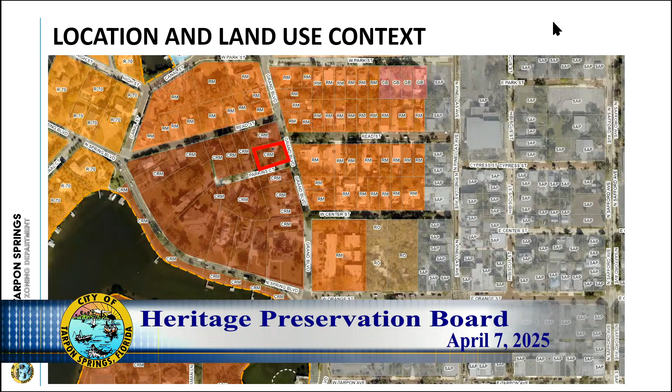Okay, Caroline Lanford, Principal Planner with the City of Tarpon Springs. We're looking at application 2519. This is the land use and location of the subject property at 233 Grand Boulevard.

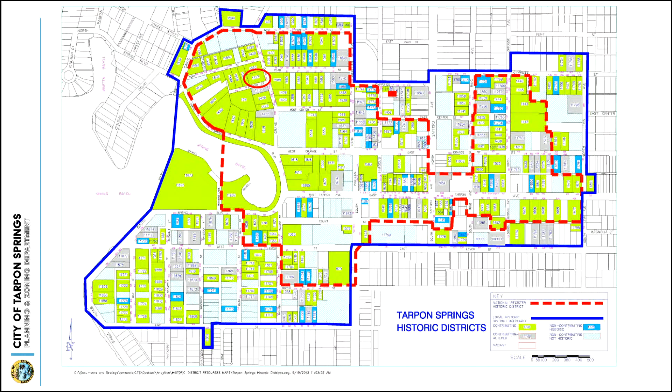This slide shows the location of the subject property in our local and national historic districts. It is a contributing structure in both. This is the 1926 Sanborn map, and the empty spot that is circled is where the subject property sits now. It was believed to be constructed about 2 years after this map was made.

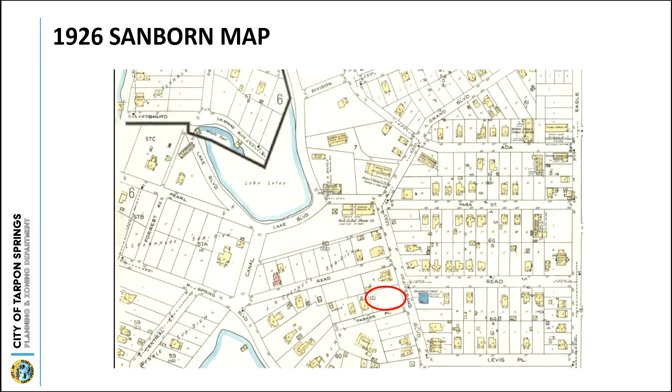So the information on the property is on this slide. It is a Tudor revival circa 1928. It is a contributing structure. The applicant is seeking a certificate of approval to elevate the home approximately 6 feet above existing grade, enclose the existing patio, add a new wraparound wood deck, and a new exterior porch and stairs to lead up to the front door.

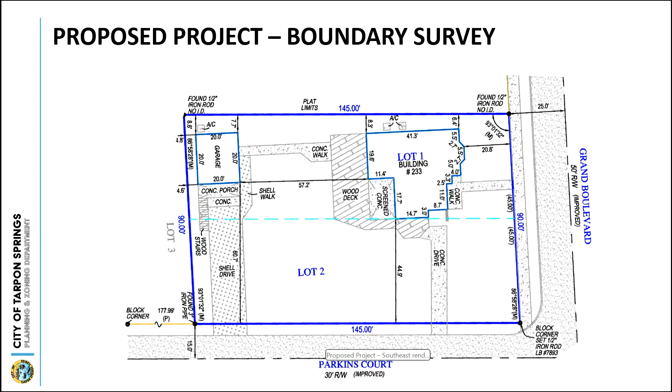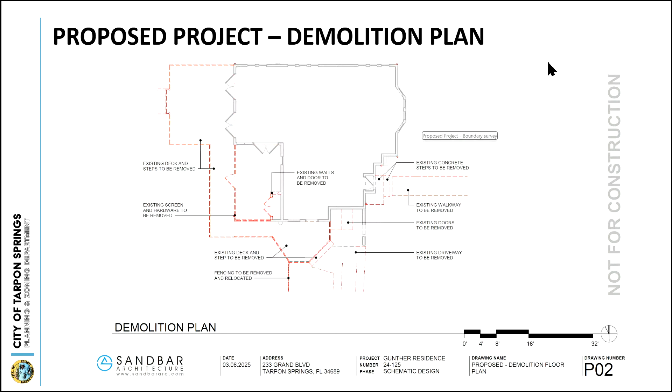It's some further southern context. So this is the boundary survey for the subject property. This slide shows you the site plan that they have. This is showing their plans for demolition. And then the proposed ground floor plan. This is showing you the proposed east elevation.

You'll notice there'll be a new first floor, and then they're proposing to carry the porch out past the historic home to tie into the proposed wraparound deck that they have on the back. They made an attempt here to try and pay homage to the original wing wall.

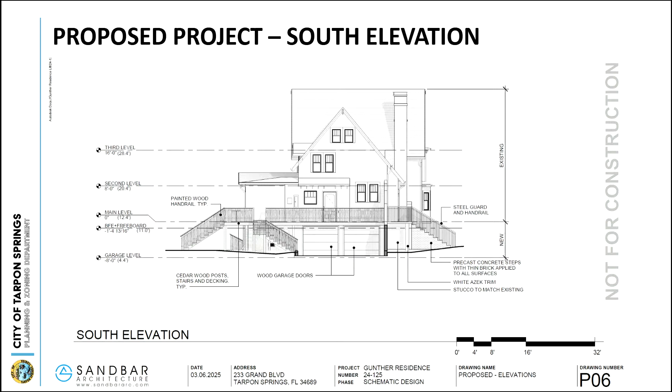And this is showing the south elevation with proposed garage doors leading into that new first floor kind of basement area with the proposed wraparound porch. Notice here they've pointed out using steel guard and handrail, but painted wood handrails with cedar wood posts, stairs, and decking. This is showing the west elevation.

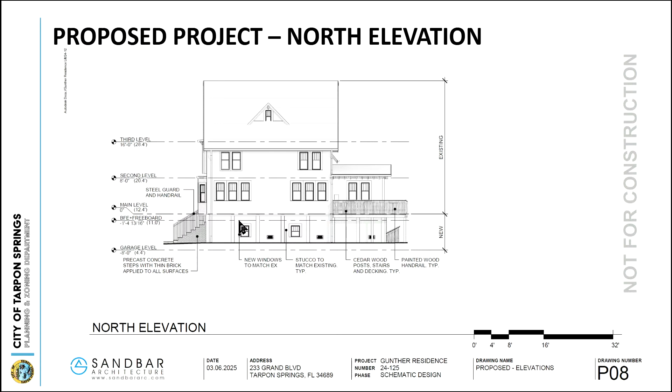So some more of that wraparound porch you can see behind that proposed new wing wall. And then the north elevation. Here's some renderings, just to kind of give you a better idea.

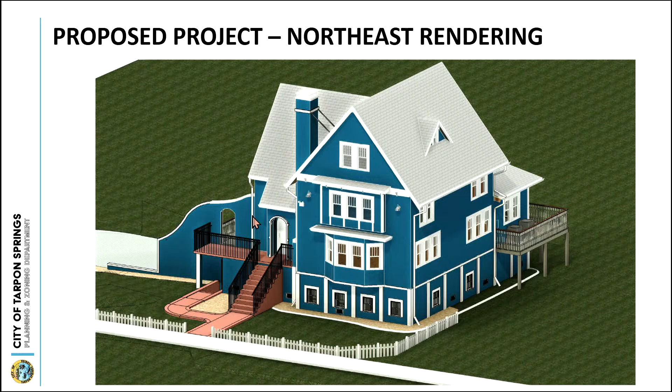And this is from the southwest, the northeast. They've also included a landscaping plan.

So we'll go through our standards for review. Actually, new construction consistency should have been highlighted. So our first...

Our first criteria is whether the height or width of any proposed alteration would be consistent with adjacent contributing structures and structures of similar character and architectural style found throughout the immediate district or neighborhood.

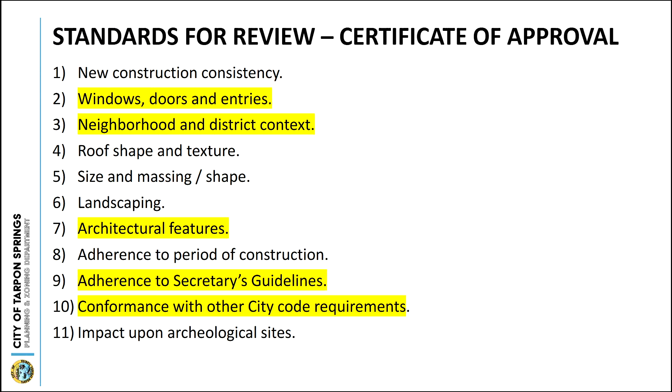This subject property is located in an eclectic area of our historic district. We've got Gothic revivals across the street and to the north, frame vernacular just to the south. There's a craftsman just to the west of the subject property. So there's kind of a mix, and in this area, a lot of the properties surrounding the subject property are larger, more than one story, and kind of grand, imposing buildings.

There are only 4 Tudor revivals in our local historic district, and this is the only one that is not one story. So it's kind of unique on its own, elevating it, it being unique in that it's the only one. There's really no other architectural peer to compare it to.

So it's my opinion that while elevating the structure would change the height of the contributing structure, because it is in this area surrounded by other large, tall buildings, some of the visual impacts of elevation would be lessened by that surrounding.

Our next criteria is the width and height of the windows and doors being consistent with the character of the building's original architectural style.

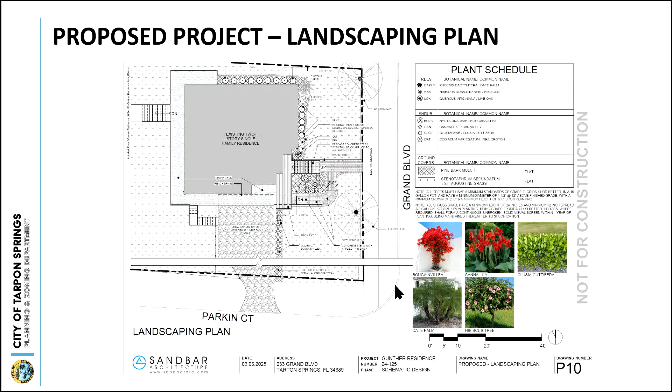Criteria number 7 is that distinctive architectural features shall be repaired rather than replaced wherever possible. The main architectural detail that I'm concerned about here is that historic wing wall.

Let's take a look at it. So you can see this wing wall here and its relationship to the historic structure, and then what's being proposed. It's rather different. I understand it seems like they're trying to pay homage to the original architecture, but I just feel like it's not working, and it's really altering that historic facade.

A design solution exists, there's any number of design solutions. In consultation with the county's historic preservation specialist, his preference would be for the historic wing wall to stay at ground level.

But I'm asking as a condition, if you should choose to approve this, that we look at the design of this wing wall, and also plans for the guards and rails for the stairs on the facade.

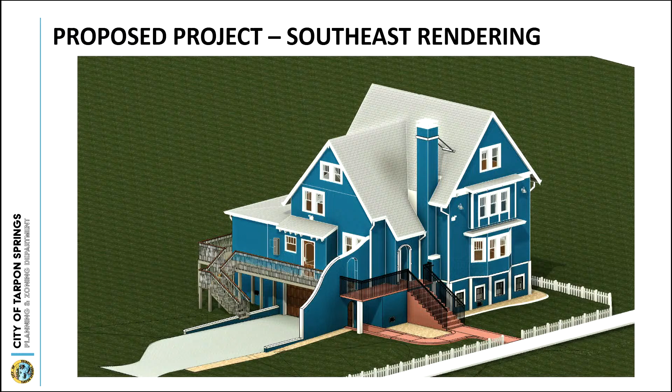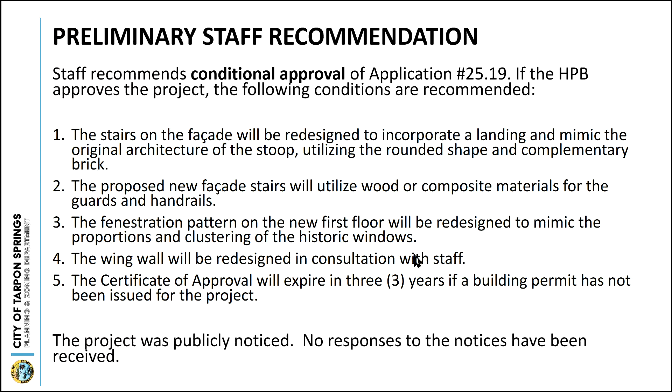So with that, I'm recommending conditional approval. I've got quite a list of conditions.

The first being that the new ground floor should be differentiated from and subordinate to the historic structure. Design solutions can be developed, so I'm asking that the board condition any approval with requiring that some sort of design solutions be developed with staff.

The second condition would be that the stairs on the facade would be redesigned to incorporate a landing and mimic the original architecture of the stoop at the bottom, utilizing the rounded shape, because the existing historic structure's entryway really focuses on arches, and there's a rounded stoop here. So you've got the rounded batten door, you've got the rounded arch. I feel like the design could be improved by calling back to that shape.

Condition number 3 would be the new porch on the facade would be redesigned and limited to the extent of the historic home with no connection to the wraparound deck. I'd like to see that new porch stop here.

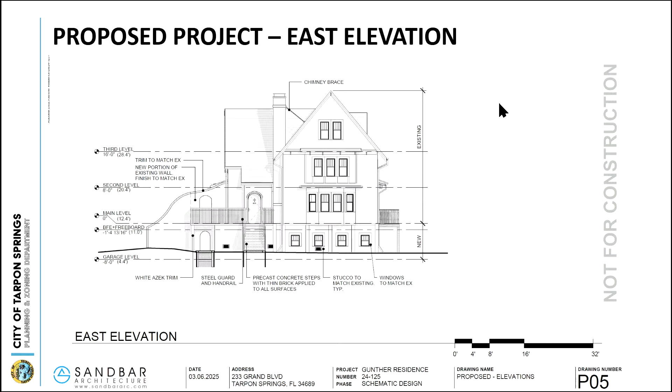And I'm going to try and find the document on here so we can all see those together. We'll just open it there.

While that's trying to load so that we can all take in the 9 conditions I'm recommending for approval, do you have any questions?

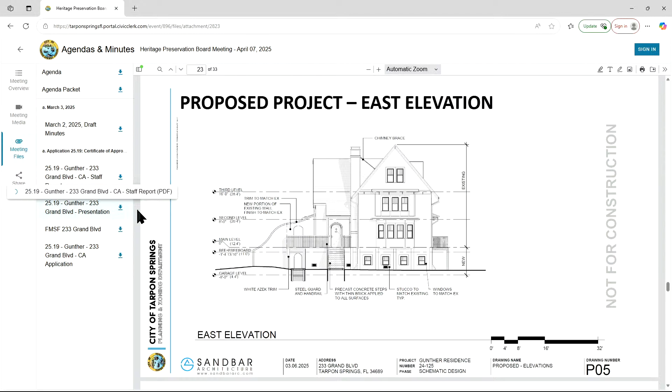Yeah, in our packet here, it only shows the 5. It wasn't updated. Yeah, I updated the staff report and presentation today because I got comments from the county historic preservation specialist today. Could you bring those up then? I'm trying to, let's see if a refresh won't help.

Okay, thank you. Can you leave that up too for us? Certainly.

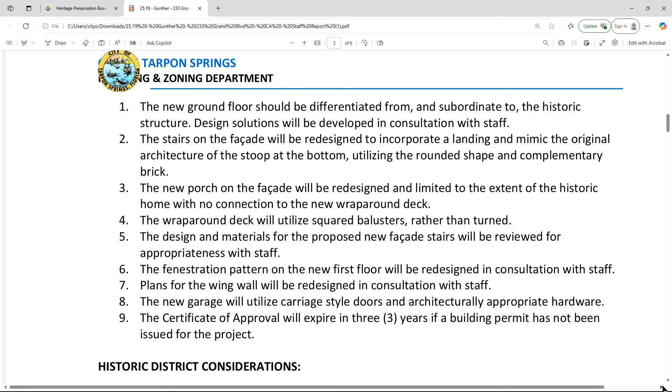Are there any public comments, pro or con, about this project? Give us your name and address, please.

Yes, my name is Renee Torres. I live at 400 Grand Boulevard. I am a retired architect, a historic preservation architect. I have presented before the board when the church that was shown, I led the remodel efforts there.

My point of information was you showed a house at the corner of Reed and Grand that was elevated somewhere in time. You can see it in the pictures that you showed, so there is a precedent already in the neighborhood. This house was lifted. I am applying for the same process through Elevate Florida. I have a big gray Craftsman that sits at a 7-foot finished floor elevation, and in spite of being finished at 7 feet, we flooded a foot. So I came here to see how this was going to work.

I think everything has been done by the book and very professional. So, thank you, good luck.